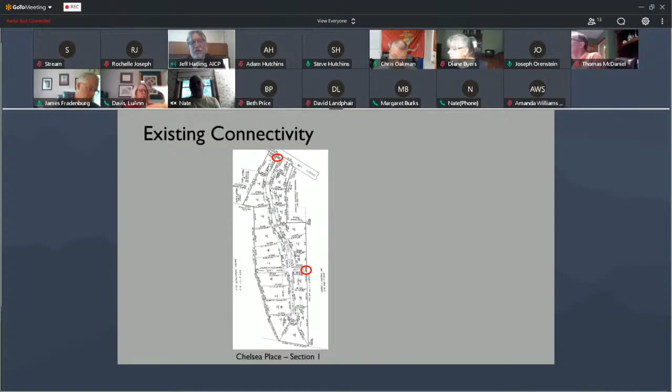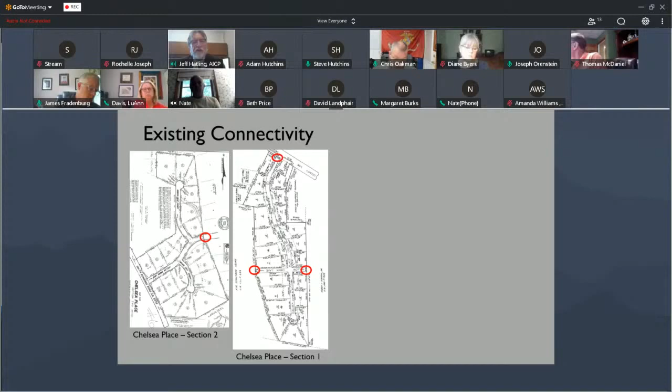The existing connectivity is with Chelsea Place, the first section of Chelsea Place, accessed off County Line Road, and then Hollow Creek Lane to the east and to the west. Chelsea Place second phase continued Hollow Creek Lane to Smith Edwards Road. This project tonight, Stonehaven, is to the east of Chelsea Place with further continuation of Hollow Creek Lane to County Line Road.

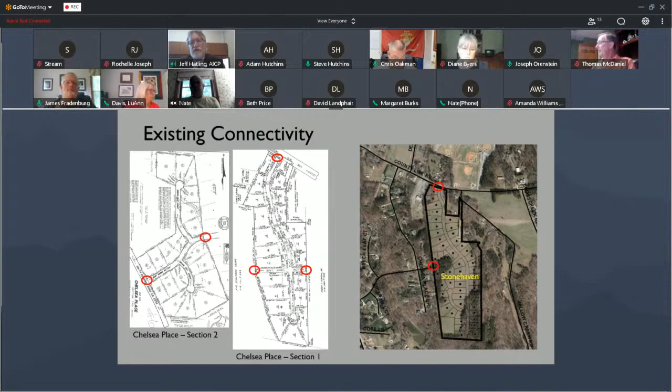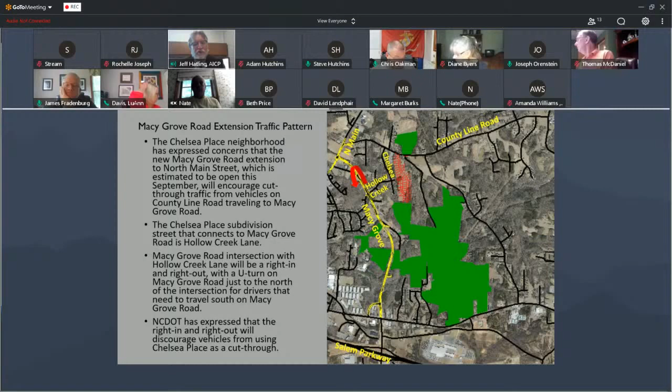Macy Grove extension traffic pattern. The Chelsea Place neighborhood has expressed concerns that the new Macy Grove Road extension to North Main Street, which is estimated to be open this September, will encourage cut-through traffic from vehicles on County Line Road traveling to Macy Grove Road and also Macy Grove up to County Line. The Chelsea Place subdivision street that connects to Macy Grove Road is Hollow Creek Lane. Macy Grove Road intersection with Hollow Creek Lane will be a right in, right out with a U-turn on Macy Grove, just north of the intersection, for drivers that need to travel south on Macy Grove Road. NCDOT has expressed that the right in, right out will discourage vehicles from using Chelsea as a cut-through.

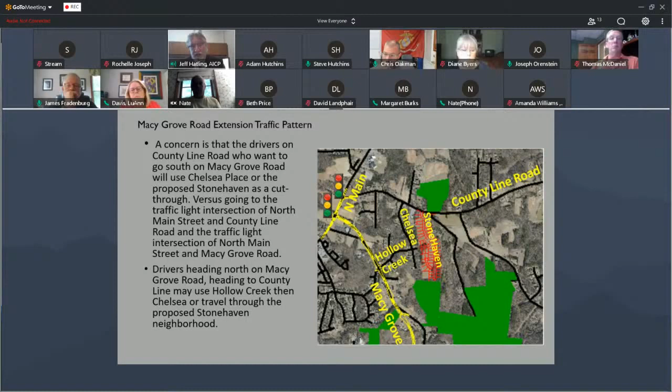Further, regarding that traffic pattern, a concern is that drivers on County Line Road who want to go south on Macy Grove Road will use Chelsea Place or the proposed Stonehaven as a cut-through versus going to the traffic light intersection of North Main Street and County Line Road and the traffic light intersection of North Main Street and Macy Grove Road. Drivers heading north on Macy Grove Road heading to County Line may use Hollow Creek, then Chelsea, or travel through the proposed Stonehaven's neighborhood.

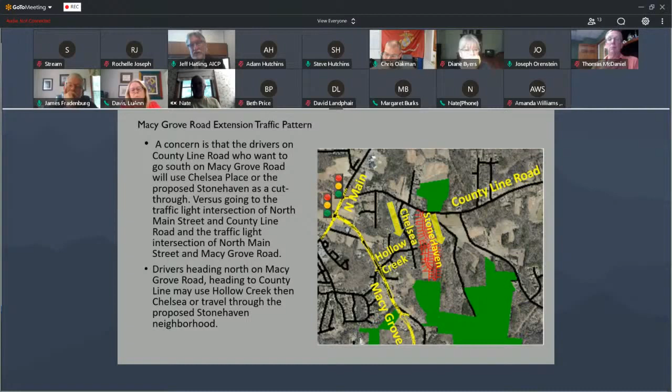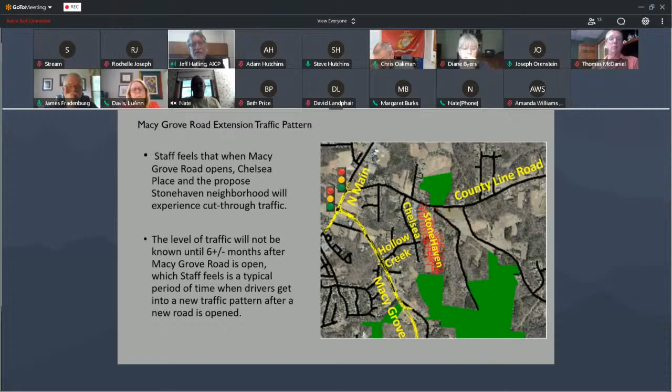Staff feels that when Macy Grove Road opens, Chelsea Place and the proposed Stonehaven neighborhood will experience cut-through traffic. The level of traffic will not be known until 6+ months after Macy Grove Road is open, which staff feels is a typical period of time when drivers get into a new traffic pattern after a new road is opened.

Further in that traffic pattern, if Stonehaven subdivision is connected to the Chelsea Place subdivisions, drivers on County Line Road heading to Macy Grove Road will be given 3 options. Drivers turning into Stonehaven to get to Hollow Creek Lane, then to Macy Grove. The second option would be drivers turn onto Chelsea Place Drive to get to Hollow Creek Lane, then Macy Grove. And the third option, drivers turn onto North Main Street, then Macy Grove Road. So basically, traffic to the north coming off County Line Road would have those 3 options.

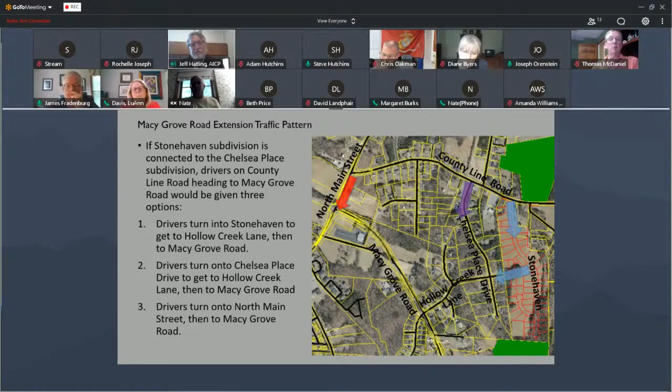Given these three travel options, traffic will have a greater chance to spread out. If Stonehaven is not connected to Chelsea Place neighborhood, leaving only two options, Chelsea Place Drive would have a better chance of attracting additional traffic.

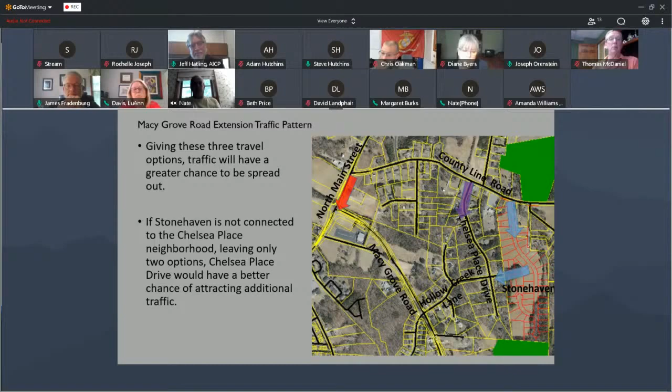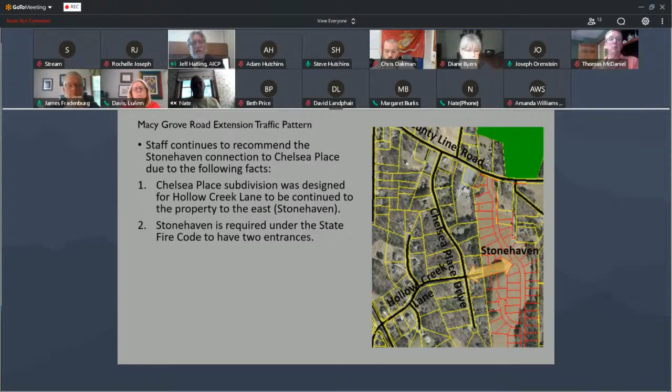Staff continues to recommend Stonehaven connection to Chelsea Place due to the following facts. Chelsea Place subdivision was designed for Hollow Creek Lane to be continued to the property to the east, which is Stonehaven. Secondly, Stonehaven is required under state fire code to have two entrances. Thirdly, Stonehaven is required to be connected to Hollow Creek Lane stub street under the town's Unified Development Ordinance. Fourthly, connecting Stonehaven to Hollow Creek Lane will enhance the distribution of traffic between County Line Road and Macy Grove Road, thus reducing traffic on Chelsea Place Drive.

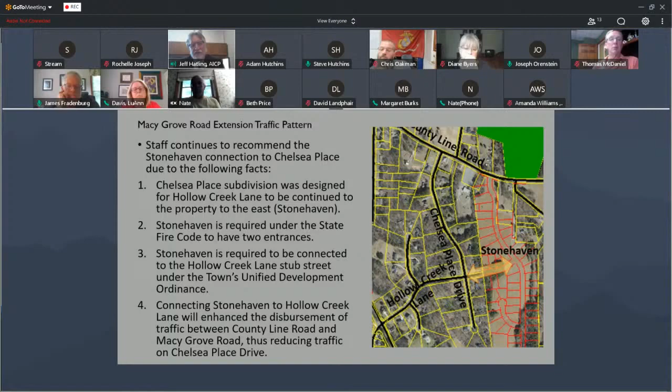A revised stormwater and drainage plan was submitted and forwarded to the planning board agenda, and planning board members and the public have access through our website. The developer, to address some of the concerns of stormwater from the adjacent property owners in Chelsea Place, is proposing 3 dry stormwater retention ponds. Dry stormwater retention ponds are basically a dike or pond that water fills up during storm events and is slowly released. And after the storm, it becomes dry again. That's what they're called, dry retention ponds.

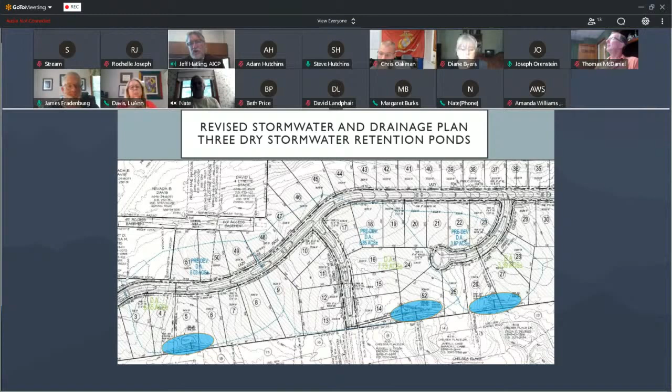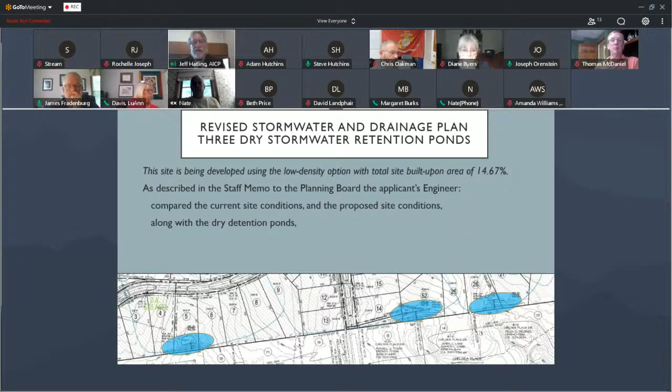The site is being developed using the low density option with a total site built-upon area of 14.67%. As described in the staff memo to the planning board, which is on the town's website under the planning board agenda, the applicant's engineer compared current site conditions, which, if you've been out there, is basically bare soil with weeds. They're no longer growing crops on it. So it's a pretty hard surface with scattered weeds. And the proposed site conditions along with the dry detention determine the stormwater will have a reduced peak runoff leaving the site for most storm events.

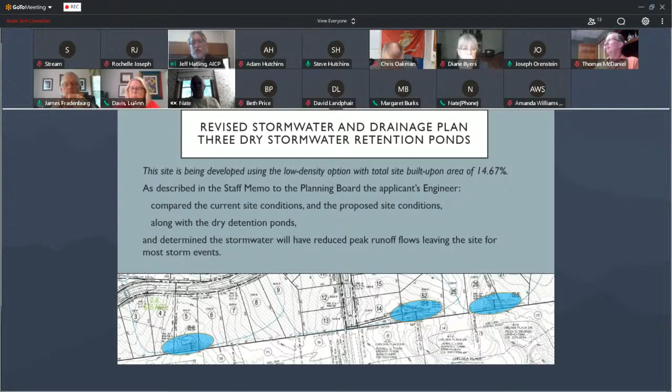So basically, in summary, the ponds will hold back some water during a storm event. When the property is developed with grass and homes and driveways and so forth, it'll have similar runoff you have now with that bare soil with just scattered weeds throughout the site. A professional geologist sent a letter representing the property owner at 1781 Chelsea Place Drive, which is at the end of Chelsea Place, off the cul-de-sac.

It's important to note that regarding the stormwater runoff it referred to, the proposed dry detention ponds are not a requirement of the subdivision ordinance. The applicant has volunteered to install the dry ponds to reduce the rate of runoff. Since the ponds are not a requirement of the town ordinance, there are no town standards that apply. So basically, the developer in this case is going above and beyond our ordinance to address some of the stormwater concerns of the adjacent property owners.

Also the letter from the geologist talked about on-site wastewater disposal. The letter was from Mr. Nelson. As Mr. Nelson stated in his letter, the county soil scientist, which is Forsyth County Health Department, will do an on-site examination of the soils.

The Forsyth County Health Department will review proposed septic systems once the home builder applies for a septic approval. It's important to note the town of Kernersville has no jurisdiction in septic system review. The geologist letter and the developer soil scientist letter that was just submitted around 4:30 and posted on the website and sent out to the planning board, responding to the geologist letter, should go to the Forsyth County Health Department.

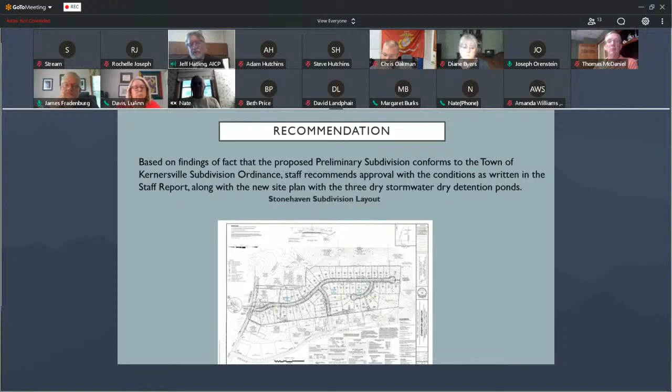Staff recommendation: based on the findings of fact, the proposed preliminary subdivision conforms to the town of Kernersville subdivision ordinance. Staff recommends approval with conditions as written in the staff report, along with the new site plan with the 3 dry stormwater detention ponds. Staff would be happy to answer any questions you may have.

I've got a question or two. This is Joe Orenstein, if I may. On the matter of the responsibility of this board in terms of making a determination regarding the subdivision approval, do we have any kind of authority or jurisdiction or review on stormwater issues, or specifically with respect to dry retention ponds?

Under the subdivision ordinance, as we have narrative in the staff report, the developer is required to show how the site will drain, which they did on their first site plan they submitted. After some concerns, the developer came back with that second phase and proposed the dry detention ponds, and certainly staff supports the dry detention ponds. Any type of dry detention ponds will help offset some of the rate of runoff.

You don't see very many around town. I participated at Grace Presbyterian Church off Hopkins Road, worked with Doug Jewell, an engineer who also went to Grace. We used a dry pond at that site because it was adjacent to a residential neighborhood. They can be quite effective because they're holding back water during a storm event. So staff is recommending that we accept the dry detention ponds, which could be better than not accepting.